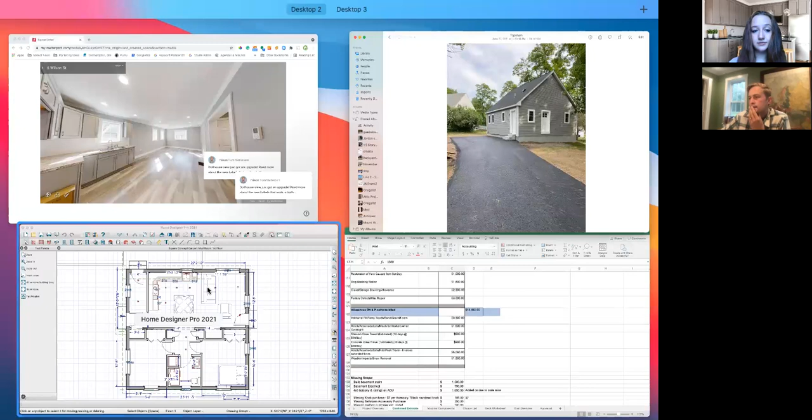So let me jump over to this to show you the floor plan of this house. This house in particular, it's a version of our square homes. It's 740 square feet wall to wall, and it's designed.

The primary design feature over some of those squares is to get covered parking, whether it's a garage or a carport, directly against the side of the house, so there's immediate access without having to go through the elements, which anywhere in New England is great, and it's even better if you're getting a little bit older and need to worry about slippery steps, because the primary steps to get in are undercover.

Other notes on this: so you come in from the carport, we've got this nice mudroom area, a mudroom closet, big kitchen area for a table, living room area, and there's lots of storage in these square homes. Typically down the center, we're able to get just a menagerie of different closets. We've got a coat closet, a closet that can have a closet system. We've got a linen closet, we've got a pantry. This closet is usually going to get shelves floor to ceiling, and then another coat closet. So just a ton of space to store stuff in here, which is always good in these small homes.

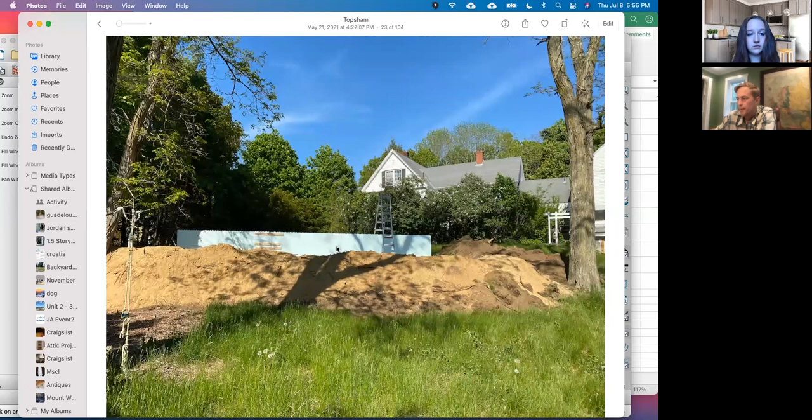So this basement has a good amount of space in it, and again, we did this to keep the house level as the slope dropped off. You can see we're kind of downhill from here, and you can see that back wall. Let me grab a shot.

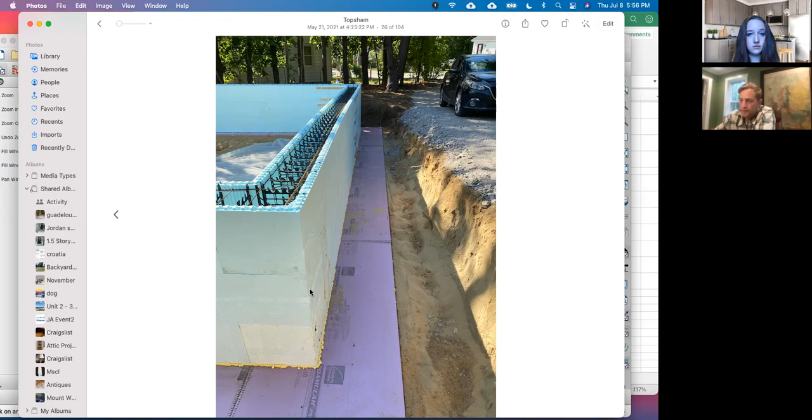This is the frost protection aspect of this foundation. It's an EPS insulation board, which essentially lifts the frost line up around this house, so it prevents the frost from getting underneath and forcing the wall up. It also keeps the temperature of the ground under the house closer to 50-55 degrees, like you'd get if you did a full basement.

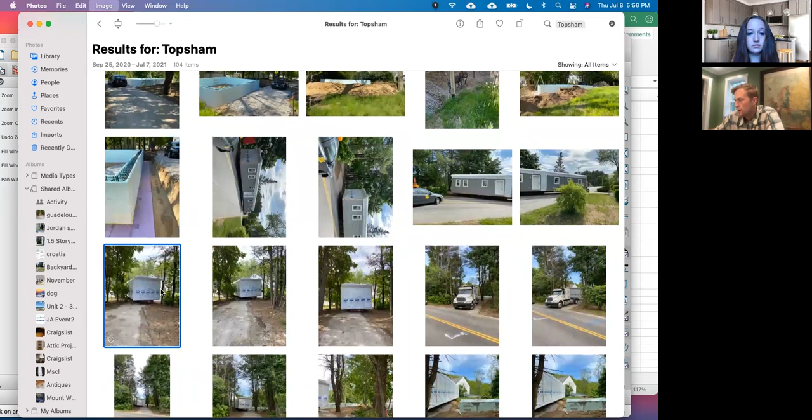A lot of questions we get are, can you get the house in my backyard? Well, this was a pretty tight lot, and we got it in there. Not the tightest we'd done, but as you can see, we snuck it right in, right up against the trees on either side.

There's usually a way to get the bigger boxes in, boxes being the different components of a modular home. And if it comes to it, there's always opportunity to design the house so the pieces are a little bit smaller, so you can get them into a smaller area, or if we need to lift them a longer distance with a crane, we can make them smaller so they're a bit lighter.

You can see that just hanging out up the driveway. Let's see.

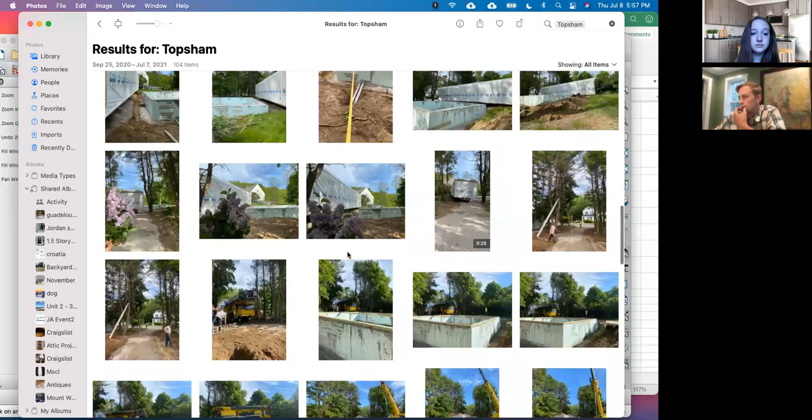So this is a couple of photos from the set. We put the first box down, and then the other one's coming up and getting dropped right there, all done with a big, I believe this is a 75-ton crane that we were using on this job.

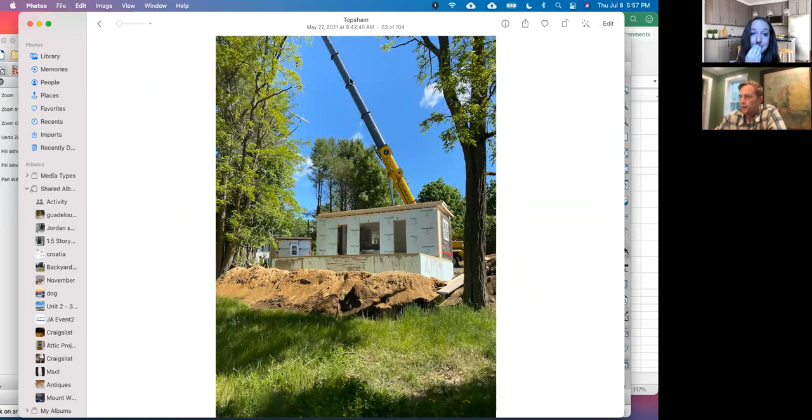All right, well the rest, you've seen these photos. It's a view out the side door, out at the carport, which is now done as of today.

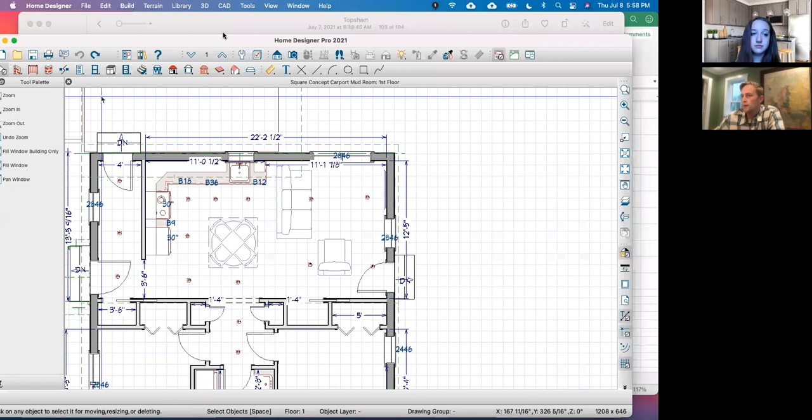Are there any questions about the house or the photos or the process? Wanted to pause for a second to give anyone a chance to ask any questions that you've got.

Where do we fabricate the components? Great question. Our factory partner is in Pennsylvania, and we've toured a lot of different factories, and we landed with the group in Pennsylvania. They're called PBS, out of Middleburg, and they've been a great partner to help work on smaller homes, which are an unusual thing to build in a modular environment because the typical home is a lot bigger. They've been great working with us to fit it into their production process without causing costs to skyrocket, which is the case for a lot of groups that have tried to do smaller homes in modular and keep them modular. Keeping the cost down is tough, so they've been great, and we are constantly looking to improve, but they do a wonderful job.

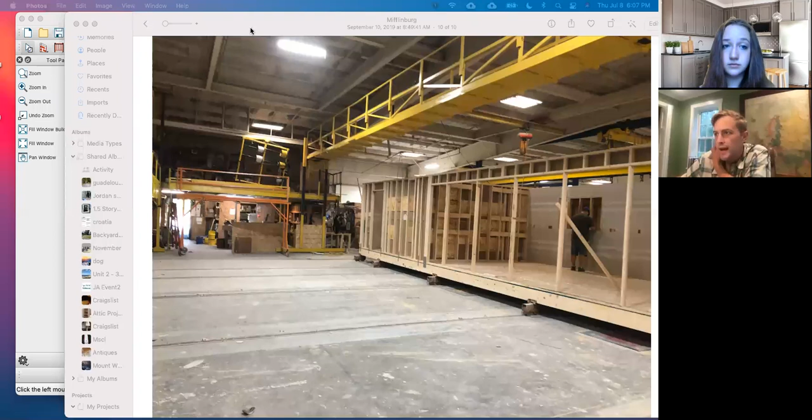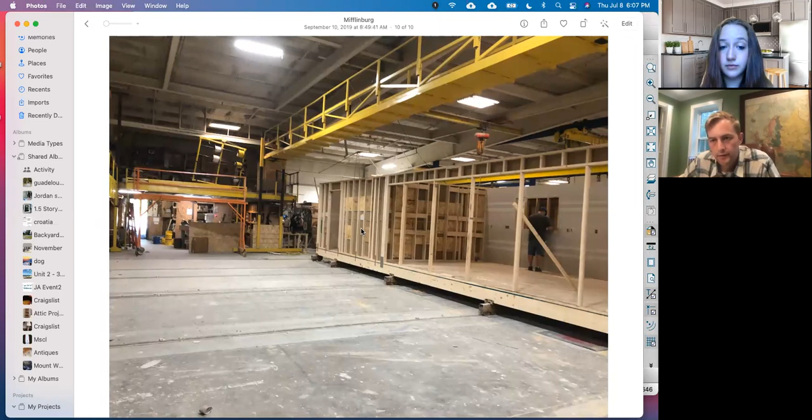Am I on the right share, desktop 2? Can Alexa, is my screen being shared? Yes, I'm looking at the inside of a warehouse. So we don't typically get photos of all the houses as they're getting built in production. We stay up to date with them by looking at the production plans that are provided to us. So an example of those were...

So we're using those to make sure that everything is to spec. Here's an example of some building plans on something that we're working on that's going to be going into production soon. So we're using these to make sure what gets done in the factory is done correctly. We're working, and the partnership is relying on the several layers of quality control in that factory to make sure it's getting done to the specs in here, rather than getting play-by-play photos from the factory line. But we do go out there to review and then just check in and make sure everything is continuing to be what we expected and what we signed up for when we started working with them.

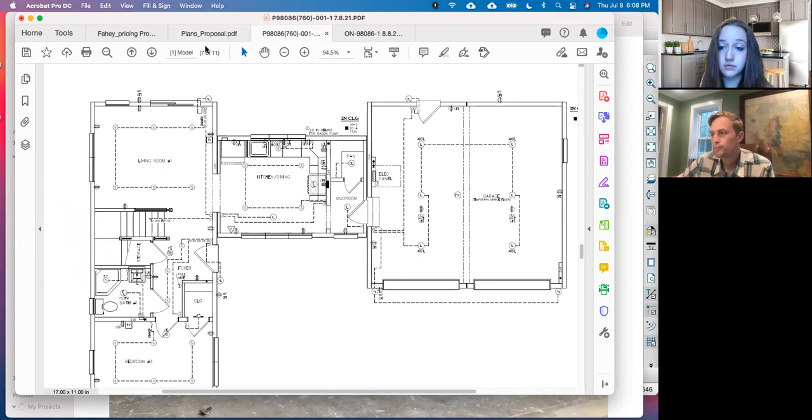But this is a shot of right on the factory line. And we do have a lot of additional photos.

So if you go to our website, so the very first house we did, so it's down in the bottom. If you go to the blog, and we can send this out too, Alexa, if you want to take a note, we can send this out in the follow-up. In the blog, we've got a project diary for our very first project on Mayher Street in Easthampton. And this is a detailed play-by-play of exactly what happened in the factory, from framing the floor to putting the walls up, to doing the drywall. It's got everything in here.

And we do have a second one of these in the works for the story-and-a-half house that is in Brunswick, which was a little bit different. It was a little bit different build process, so they did a lot of photos of it, which was neat. This has got some good shots of the walls going up.

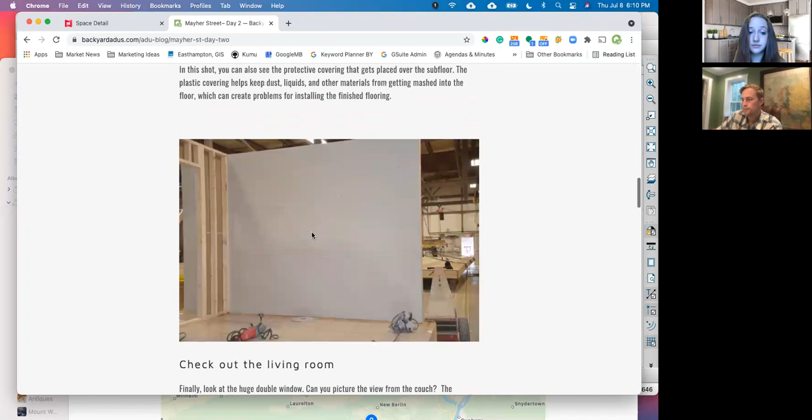And this is the first S-line home that we did. So just a very basic rectangle, one of the most affordable things that can be done because it simplifies what's being done in your backyard so much. So we'll send this link out so you can see these framing photos of it being built.

Right. So if there aren't more specific questions, I'll wrap up here just talking about a little bit about design process and customization.

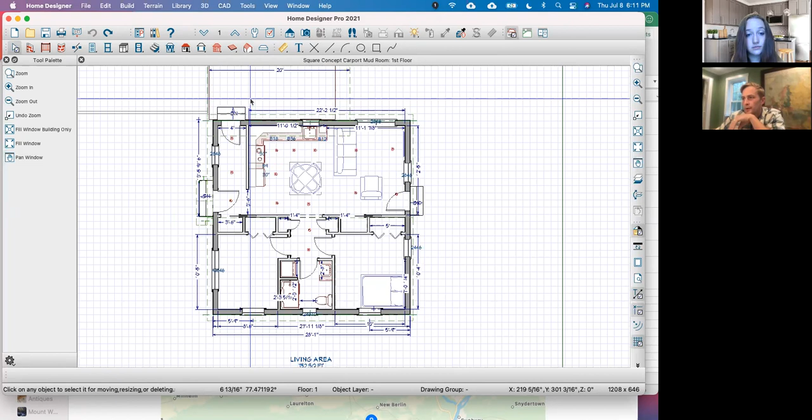So this is the software we use for doing design customization. And we specifically, when we're working with your own designer, not architects, we're home designers, working with you to hear what you're asking for and putting it into a format that can be looked at, understood, and turned into a home that's going to be very livable. And the neat stuff about this software is it's very accurate in terms of giving a sense of spatial awareness. And as we change the dimensions or layout, we can see exactly what happens.

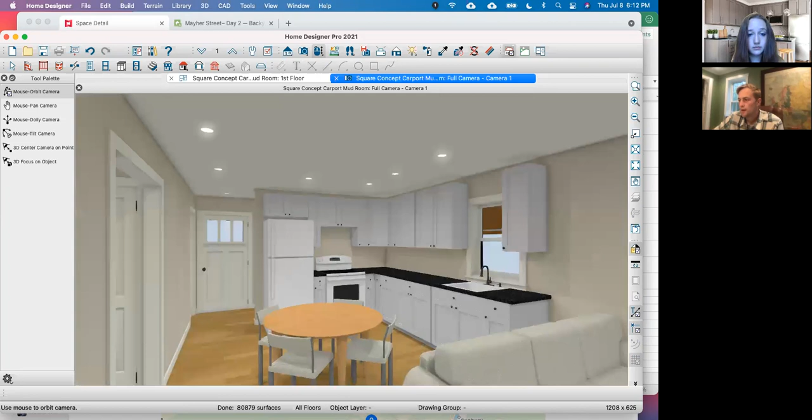So we can do a quick example of that. If we look out at this back wall in this living room space, if someone decides that they really would like to see a full-size living room that can accommodate a full-size couch and 2 armchairs, well, we can do that. And I showed this earlier. We can say, okay, well, let's make this house a little bit bigger. Let's make this living room, let's make it 15 feet. And this is just a really quick example here, so I don't expect it to be perfect, but we can do stuff like that and immediately see if we like that change or if we don't.

And obviously there's some flaws in here. The TV's gonna have to move. That door might not make sense there. But we can do this kind of stuff very easily. Same with, say we don't want that door, well, we can get rid of that door very, very quickly. So this is the kind of stuff that we're doing when we're going through the design process.

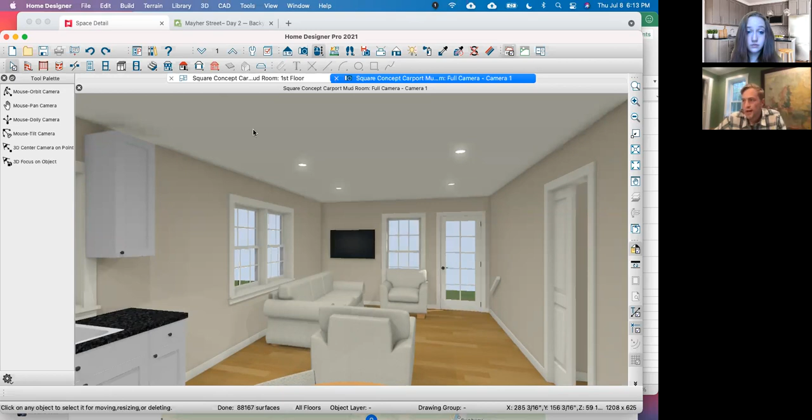We start with shapes, and that's from our legacy of starting as building these in backyards. Generally, a shape is going to work. There's going to be a shape that works in a backyard well, whether it's a boomerang shape, an L shape, a straight shape, a square shape. And then we work to get the rooms the right size for what somebody's going to be doing in those rooms and what furniture they're going to try to bring with them, what storage needs they have. And we have flexibility to work from within one of these pre-designed plans, as well as just saying someone being interested in, yeah, that looks perfect, just let's do that. And let me put a spice cabinet in the kitchen or like an apron front sink, or try vault ceilings. So there's lots we can do.

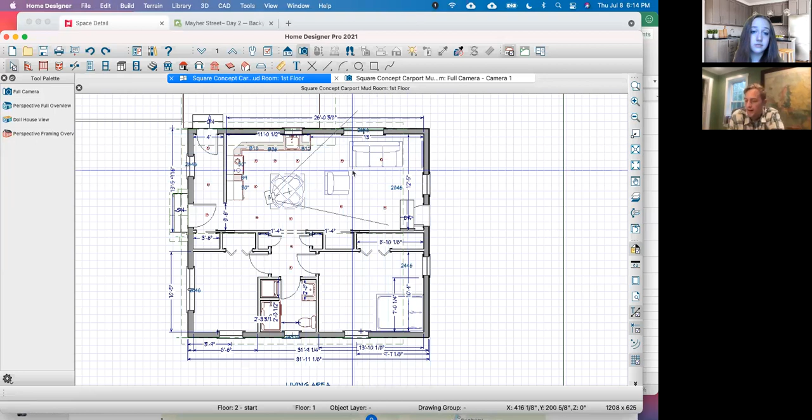And some of the bare minimum stuff that needs to be done as houses are being adjusted is making sure windows are looking in the right direction, making sure that they're facing the right way to get optimal light based on if there's shading from trees, just the north, south, and east and west exposures.

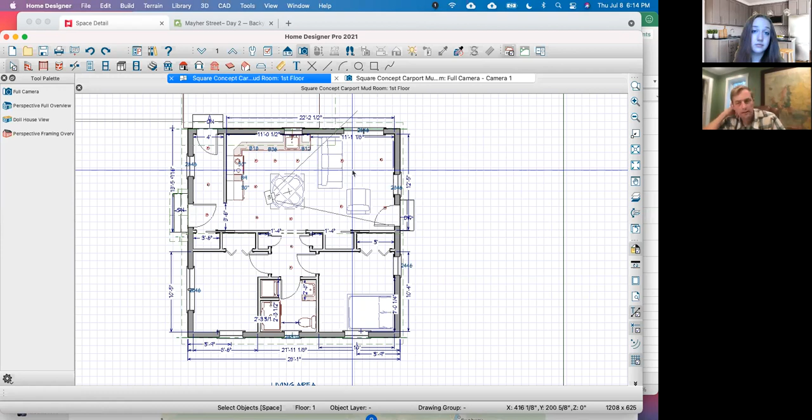Whether somebody needs covered parking or a garage, so lots of neat stuff. And another big one is accessibility.

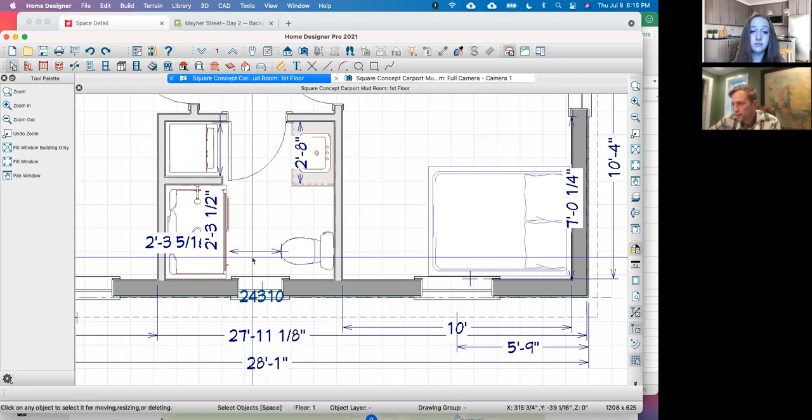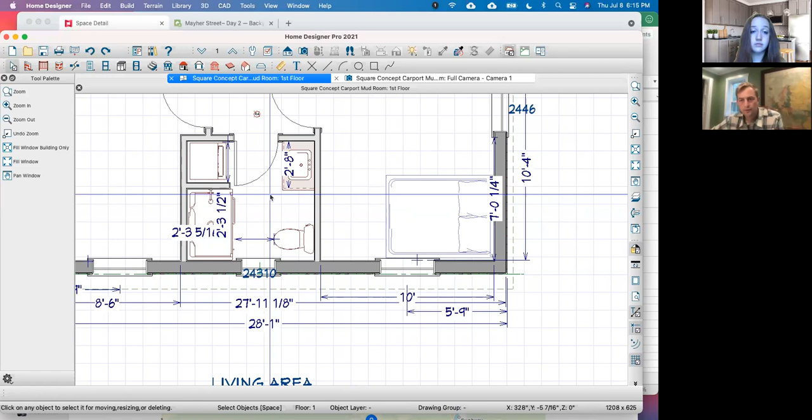This bathroom is not fully ADA accessible, but it's designed with someone in a walker in mind. Somebody could come in here, stow a walker there, get into the shower, or use the toilet, and then go back out. So it's something that as someone loses mobility, it is usable, but it could also be made into something that's fully ADA accessible. We did just finish a home in Leeds, Massachusetts, which is a 650 square foot version of this home, and it's actually a studio, and that has a fully ADA accessible bathroom.

It's got a ramp going up to get inside. It's got knee space sinks. So if the grandmother who's going to be living in there is ever in a wheelchair, her kids don't have to be constantly coming out to the ADU to help her out. She can still be independent. So there's lots of opportunity to make these what they need to be.

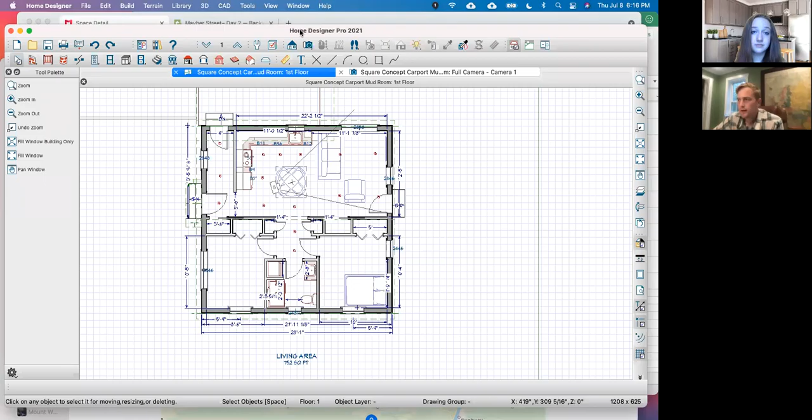All right, well I guess with that, we will be having a follow-up. The next session that we will be having, we'll be looking at the home in Leeds, which we're just wrapping up. Inside we have our temporary occupancy permit and are just finishing some exterior landscaping.

It's a really neat house. There's turquoise countertops and a pebble backsplash with live edge shelves, and some pretty neat colors on the walls. So we'll be touring that one. That one will be another 360 like this.

I believe we'll also be doing an in-person open house there. I think Libby, the grandmother who's living in there, wants to open up her doors and host an open house. So stay tuned for that. I think it's probably going to be in September when everyone gets back from vacation, but keep an eye on your emails. That's going to be a fun event.

Chris, we have one last question. Sure, what's the range of square footage for the houses that we build? The biggest one we've designed, I actually just showed it, is the one we're building in Williamstown, Mass. It's a 1,300 square foot 3-bedroom with a 450 square foot ADU above the garage. That's really as big as we'd want to go.